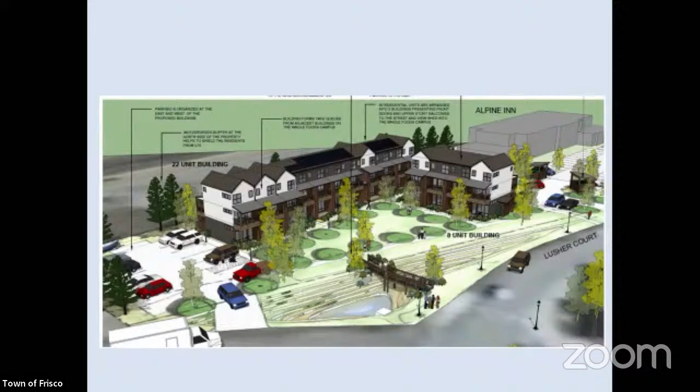This is located in the Gateway Zone District, so multi-unit residential buildings are a conditional use in the Gateway Zone District. So the applicant at this time is requesting feedback on both the sketch plan as well as the potential conditional use application. The property is bounded by I-70 on the north, the Summit Suites, formerly known as the Baymont Inn, on the east, and then the Frisco Transit Center to the southeast and the Base Camp Outer Range Brewing and that development to the southwest.

The site, so this parcel, it's an odd shaped parcel. As you can see, it's a triangular parcel, about 2.5 acres in size. It was platted originally in 1973. As you can see here, the current Alpine Inn is located in the northeast corner of the property. That was originally constructed in 1994.

And then prior to the construction of the Alpine Inn, there was a snow storage easement that was created in the central part of the lot right here, I'm highlighting with my cursor. That snow storage easement is for the benefit of the Frisco Station development. So that's where the Walmart and Safeway and those all other businesses have their snow storage.

Recently, actually about a month ago, planning staff approved a planning application to relocate that snow storage easement from this current location to the very extreme westerly portion of the property. It met all town standards for that. However, we have received a public comment today from an attorney representing the Frisco Station that they have not yet executed that snow storage easement.

As this is still a preliminary sketch plan application for this, it can certainly go ahead and move forward. Once you get to the final site plan approval, if the application proceeds to that point and the easement has not been resolved, that certainly could be a condition of approval. No building permits will be issued if that easement is not relocated. So again, that's the applicant moving forward at their own risk if they so desire. But again, the easement will have to be formally recorded and relocated before any building permits will be issued.

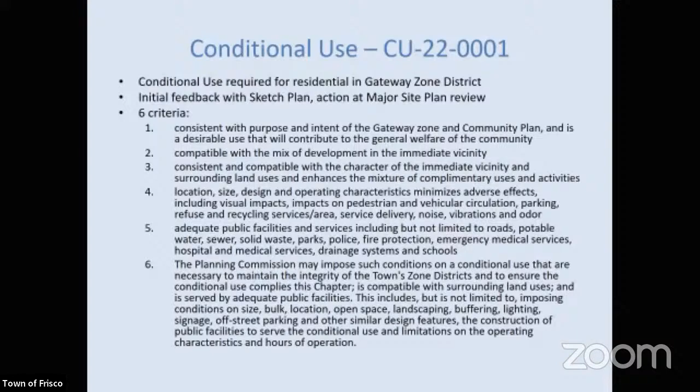Moving on to development standards, I'm going to only highlight and focus on the development standards which are not apparently met at this stage of the application, and also standards where it may be worth feedback to the applicant on those from the planning commission. So some of these key standards are...

Non-vehicular access. This is highlighted because we are now placing a residential use in a commercial area, and it's a conditional use. I think the access is probably adequate for the current vehicle-oriented commercial uses that are present in this area. The question maybe for planning commission to consider is: is the proposed non-vehicular access, pedestrian and bicycle access, adequate for the addition of residential uses into this area?

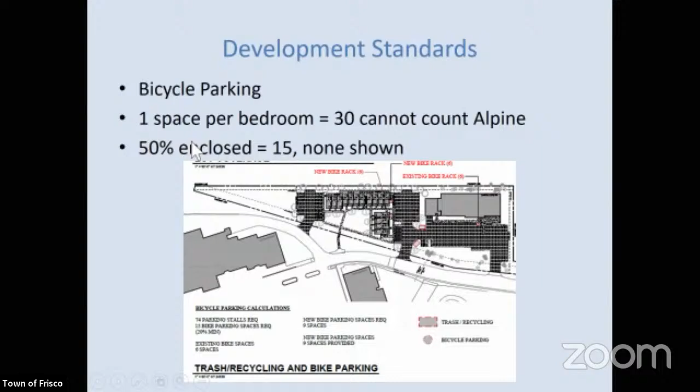Additional comments, and now we get into some of the development standards. As this is a mixed-use development technically, because it is on a parcel with an existing commercial use, which is the Alpine Inn, the non-residential development standards do apply to this.

Some of the keys here I'll just highlight are facade standards, building elements, and articulation as standards that may not be met at this time or may require additional information. In particular, I'll highlight a couple.

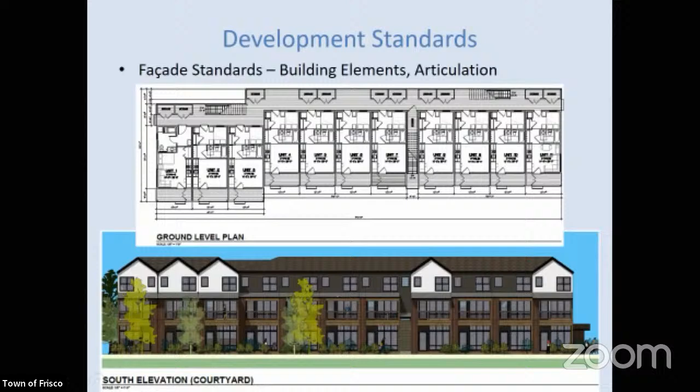Similarly, the roof standards require that no more than 66% of the roof line is at any particular elevation. Based on the information presented at this time, it's not clear whether or not that standard is met. So calling it out at this point in time so that the Planning Commission can request additional information from the applicant, and the applicant can provide additional detail at the next stage, at their next submittal.

Here we are with the roof standards again. Again, you see some very simple roof forms. Maybe the elevation view isn't the greatest, and maybe there are additional breaks. However, we don't have that information at this point in time.

Moving along, a couple other, and this is maybe a little bit more of a minor standard, but it is a concern again, because we are placing a residential use in a commercial area. We want to make sure that the parking for that is buffered as required by the code.

Under the code, you can have some parking in front of the building as long as it is buffered. However, in this case, the landscaping is minimal.

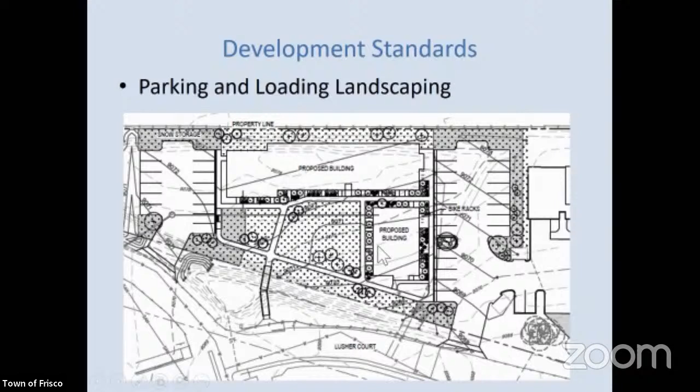Finally, staff has compiled a number of comments and places where you may be able to provide feedback to the applicant. Again, without reading them all, as you do have the staff report, some of the highlights are feedback on the proposed conditional use to allow the multi-unit residential use, potential conditions if you are inclined to approve a conditional use once the full major site plan submittal has been submitted.

Feedback on non-vehicular access, compatibility with neighborhood character in relation to nearby properties, compliance with facade standards related to building elements, articulation and variation in wall planes, feedback on roof design and compliance with roof standards, and finally building materials, colors and design, and the parking lot landscaping. So again, that's the high points.

Happy to answer any questions you may have. I do also have the full submittal from the applicant available to review if you have some particular questions on any of their design drawings.

Great. Thanks, Don. Great presentation. At this point, if the commissioners have any questions of staff on the staff report, Patrick, we'll start with you.

I'm a little bit fuzzy on the snow storage letter that we got from public comment. We're supposed to submit it when, and what's been agreed to? Can you just timeline that for us really quick?

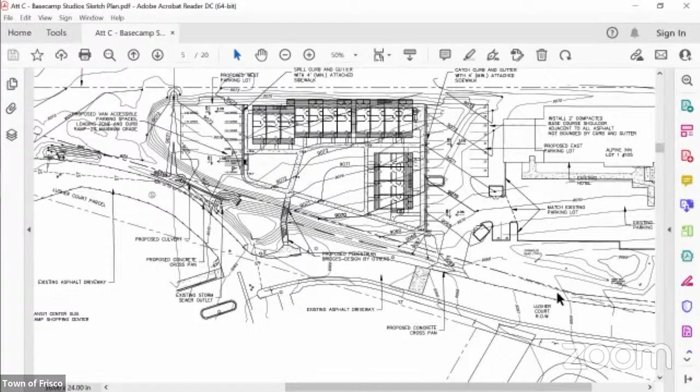Okay, and last question. In your background it says on May 3rd, 2012, planning commission unanimously voted 7-0 to approve the development application for Alpine Inn to add almost 2,200 square feet of gross floor area. That was approved, but just never happened?

No, I believe that did occur, and I think it was a conversion of space. I didn't do a lot of research into exactly what that was. The current Alpine Inn is somewhere in the ballpark of 20,000 square feet, and I don't know if that was a manager's area or what. I did not do a lot of research on that.

Thank you, Patrick. Ira? Sure, I thank you, Patrick, also, because the sidewalks and bike paths, I think, are a critical item to be looked at, and maybe, like you say, required.

So it's a commercial entity in its entirety, and this is like a residential component, which will be adjacent to I-70. So is there any addressing of safety concerns with residents backing up to I-70?

Not at this time, and there is enough of a buffer because it is the I-70 right of way. If I zoom back out on the presentation, I think you can see it. It's actually zoomed in too far, but there is a fair amount of distance between the actual property line and the I-70 pavement. So I don't know that there's a huge concern for safety from that.

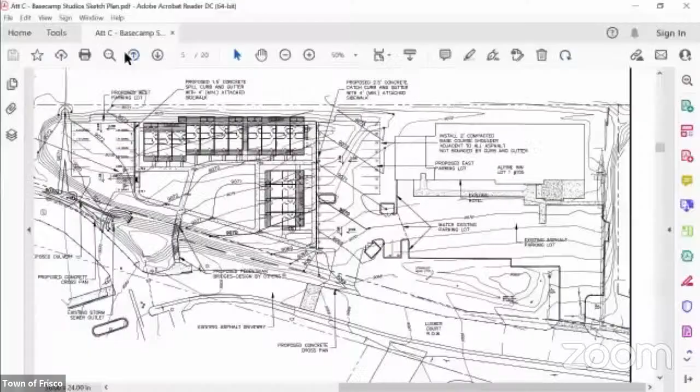I did not see parking crossing the setback, actually. What sheet are you on? Can you pull up A003 site plan? I think I can. Yeah, that's the one I'm looking at. It shows a setback on there, and it shows 3 of the potential parking spaces getting clipped by that.

Almost there. Yeah, so if you zoom in, like those 2 right there, you see that setback line. So that one right there is getting clipped, and then up at the west end, one of the ADA spots is getting clipped almost in half. That one is right there. Another spot getting clipped there.

Is that allowed? I'll have to take a closer read at the code and see if that is a code issue, and certainly we'll note that. If it is an issue, it'll be fixed before the next submittal. Okay, just curious how we treat those.

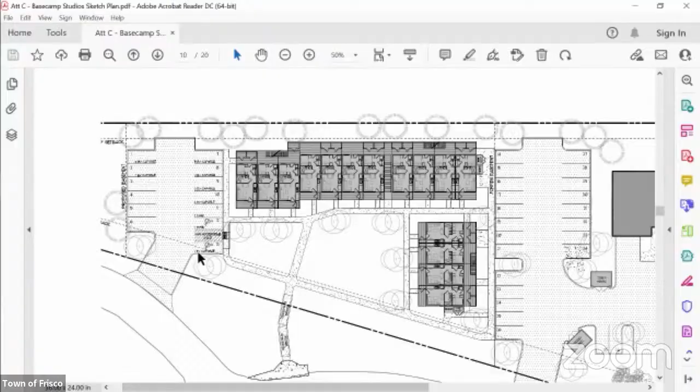And I think a lot of that is in the eye of the beholder, because the standards talk about compatibility with the general vicinity and how much duplication is there. I think you could certainly have that conversation with the applicant about the similarity. Again, at this point in time, I don't know that staff would consider that any of the facade standards have been met, because of the articulation and some of the other design issues. Right, yeah, we're going to get into that for sure. But I'm just curious because I know excessive similarity has come up on other applications in the past.

And I wasn't sure if that was applicable for this, or if for some reason we weren't supposed to be looking at that. No, I think it is applicable. I guess the standard there is, is this in the vicinity? Is this far enough away from some of those other projects that similarity doesn't apply? And that again can be in the eye of the planning commission. Okay, that's all the questions I have for staff. Thanks, Don. Thank you, Andy.

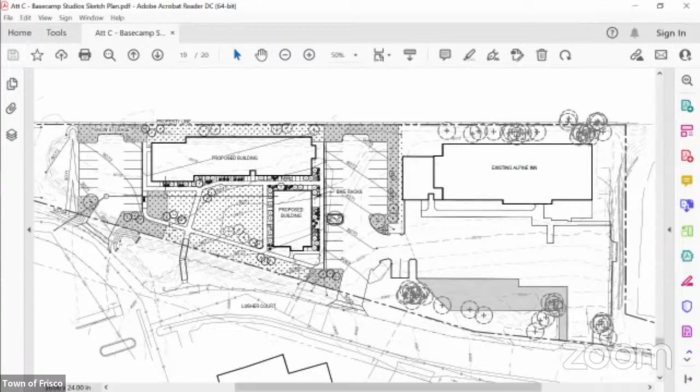Okay, great. And then my other question is, so the hotel technically right now is long-term rental housing, right? The Alpine Inn was master leased by Summit County, I think effective July 1st of last year. It is being used, it still is transient housing. They do have a master lease on it though. So there's no kitchens in it, so they're not actually considered dwelling units at this point.

Oh, okay, so it's because they don't have a kitchen, because technically it's not a hotel, it's not functioning as a commercial entity like a hotel. And so from a density perspective, I guess I could argue that they'd be going over density sort of. Yeah, and we certainly consider that as staff as well, but at this point in time, because they still only have one kitchen in that entire Alpine Inn, for the manager's unit, those units are not considered dwelling units because they do not have a kitchen.

Okay, and they could never be converted if this development gets approved, because now there's not enough density? They could, but they'd have to meet density requirements at that point in time. If this development goes through as proposed, there'd still be 9 units of density available on this property. If the Alpine Inn was to convert and deed restrict, trying to do quick math, about 20 or so of those units to 100% AMI and meet our code requirements, they could have 20 units and then 20 units deed restricted in order to make that happen.

Can everyone see this? Yes. Awesome, thank you. Good evening, and thanks for having us tonight. My name is Michael Ann Marchand, and I'm the development manager for Bryn Gray Partners.

To begin, I'd like to quickly introduce the rest of my team. Joining me tonight is David O'Neill, founder and CEO of Bryn Gray Partners, Tom Lyon of Wolf Lyon Architects, and Ronnie Pelusio of Polona Architects and Urbanists. Many of you may be familiar with our team from our past work throughout Summit County: the Wellington and Peak One neighborhoods, Centura Studios, and, setting the context for our conversation tonight, Basecamp. Also, to round out our team, we've got our civil engineer, Don Lineweber of Civil Insight, and our landscape architect, Megan Tesson of Norris Design.

Basecamp began with a vision back in 2014, and as you can see here, it was an open field framed by exceptional views of Peak One. Over the years, Basecamp has grown into a thriving and vibrant community center with establishments that have become part of daily life for locals and visitors alike. A few notable examples, which you are all likely familiar with, are Whole Foods Market, Outer Range Brewery, and the Steadman Clinic, just to name a few.

Sales tax collections at Basecamp represented 16% of Frisco's total sales tax collections in 2020. And at the end of the day, we're very proud that it's ended up being one of the world's highest transit-oriented developments due to its proximity to the Frisco Transit Center.

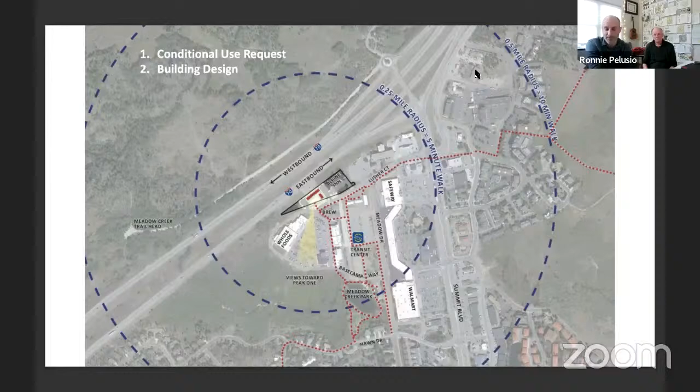I wanted to turn the attention over to the 3D model here. I'm going to have to take the screen, oh well, actually Michael, can you go to the next slide? We kind of hopped back and forth on this building. Okay, so this building is not the building that we're proposing.

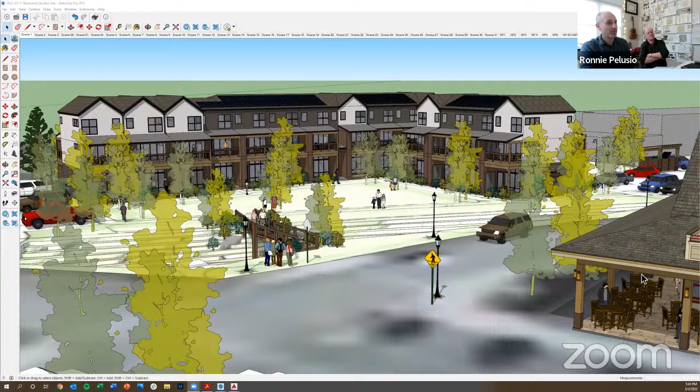We're going to come back to these buildings in a second, but I just want to point out Lusher Court is in the foreground, this brown car is on Lusher Court, and this building on the right is the brewery. The gray building in the background is the Alpine Inn. We just didn't render it yet, but we do have a really good document of the rest of the buildings on this campus, because as you know, we worked on those buildings as designers and developers.

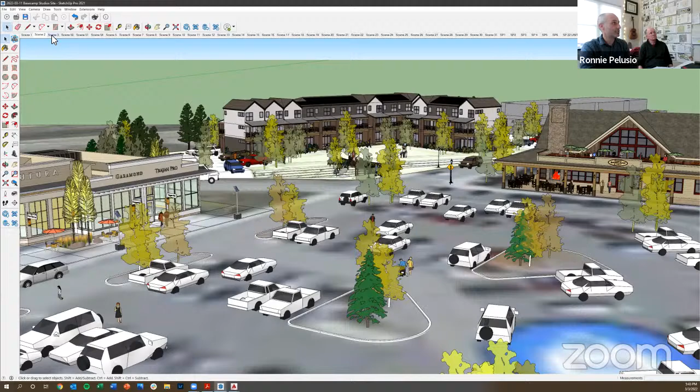And you can see that as you back out from the site, our proposed building location really helps to anchor the north end of this campus. Generally speaking, that's the north and this is the south, although the angle of this property is skewed a bit. There's a building in the foreground that we didn't render, it's right here, it's the Pinnacle building. But we have the rest of them, and we left that out so you could see this triangular shape of buildings, as well as how that northern building proposed anchors the complex.

It does two things. Again, this reciprocal relationship. It helps create a buffer for the campus of buildings, like on the north side against the highway, which is behind them. And then it also helps these buildings have opportunity for views and access to southern light across the open area between buildings of the plaza.

The way we did that is we strategically located parking on either side in kind of this dumbbell fashion on either side of our proposal. That helps get the buildings where we'd like them so they can anchor that location, as well as be convenient for residents who can access parking for themselves. But also it helps break up what could be a larger pool of parking into two smaller pools, de-emphasizing the car and putting the focus on the buildings.

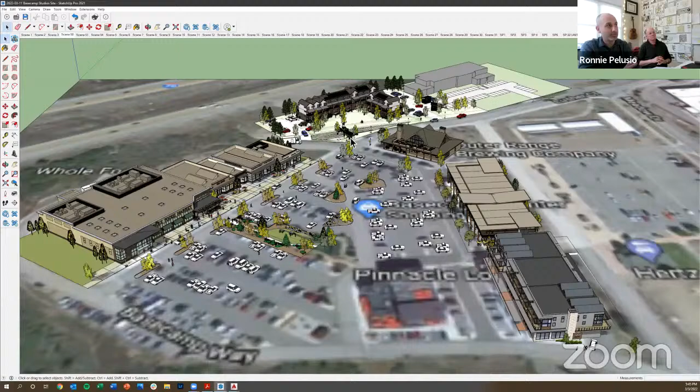I'm just going to fly down here for a second. This is the 3D model of the building we were showing you the image of a moment ago. That's already constructed on site. You can see the forward-facing gables, the horizontality of other aspects of the building, and again the asymmetrical composition of windows and the material changes. Just to note, there's a ground floor plate here, and then there are units with lofts above. So it's kind of like ground floor and then a unit and a half or two stories above that, all part of one unit.

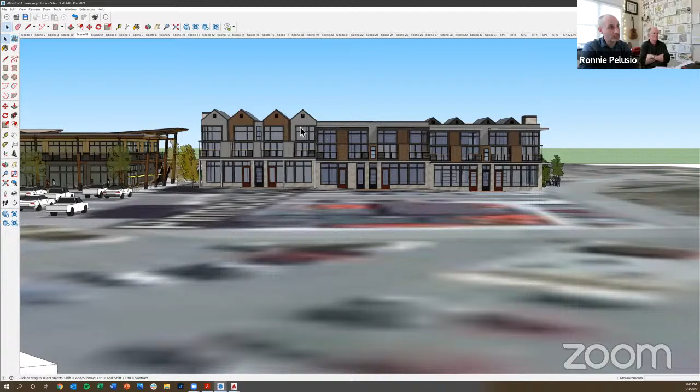So the southeast corner of the site, on the right-hand side now, and the north corner of the site again have this kind of dumbbell relationship of residential use at this location. Going back to the conditional use, this really helps animate the plaza. Obviously there's the economic benefit I described a moment ago, and the availability of resources, but it does this wonderful daily life thing as well - it brings the presence of people there 24 hours a day, which provides security, animates the public realm, and helps make this a more vibrant place. As the conditional use talks about bringing greater balance of uses, we think the addition of more residential use on this site only adds value to it.

So we're going to zoom in to the site here. And Andrew, since I see you, I'm just going to single you out - is this running smoothly on your side? Can you see okay? Good. And so we're just going to zoom into the building.

We know that in the packet there are a couple of images that show these buildings flat-on, and that's a very common architectural practice where you look at a building in elevation - it's just like a 2D representation of the building. In real life you never see it like that. In this case, in particular, we have an L-shaped proposal, so you'll always get a building that is mostly in front of another building, and you will always see this at ground level. So some of the articulation standards, in particular for roof lines that come up, we think aren't going to be viewed as described in the document, and they truly will be viewed as shown here.

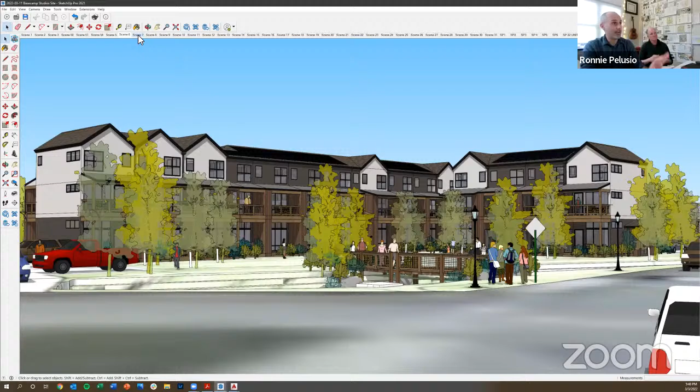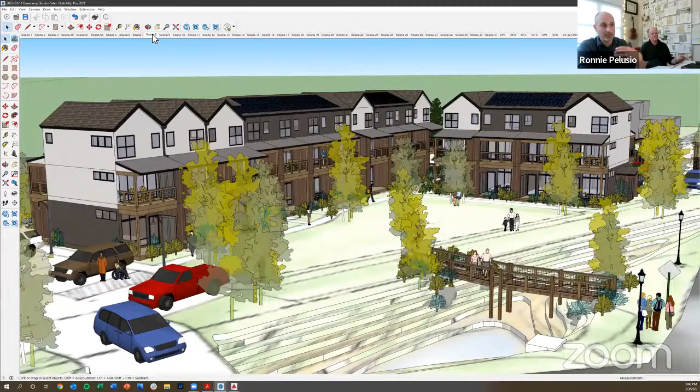I'm going to fly around. We're going to talk a little bit about the aspects of the design that provide articulation, but I want to just rotate around for a second and get up over the building. I know there are some questions about the circulation patterns - how these residents might access the greater community. We can talk about pedestrian circulation and where the sidewalks are. We thought it would be interesting to have some sort of bridge element that was a connector that was also decorative. It might not end up in this location, and we might end up modifying the sidewalk system. We have some ideas about that, and I'm sure you do as well. But we just want to say the design intent here is to create some connectivity.

And in fact, having these buildings here, as I was saying, it helps with what's happening in the common area between these buildings, but also helps animate what's happening along Lusher Court. I think it only provides a better gateway to the community.

So there are ground floor units and second floor units. Second floor units also occupy the third floor in the form of a loft, much like the other Basecamp residence building on site. Ground floor units have direct access to the courtyard.

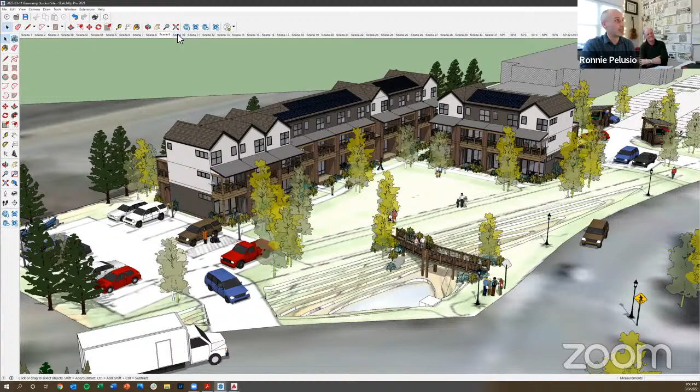They have doors and porches on the courtyard side. Second floor units also have these outdoor porches. They're covered porches, and they all have the opportunity to face this common space, bringing life and a little bit of private outdoor space for all the residents.

Each of these porches also has storage, so there are storage lockers on every one of these units. Every unit front has a porch, every unit has a storage locker, and those storage lockers and porches bring articulation to the front of these buildings that I think the plan, elevation, and 2D representation really do a disservice describing.

I'm just going to kind of float around this. The second floors of these buildings are vertically serviced, so it's like, where are the stairs at the non-courtyard side of the buildings?

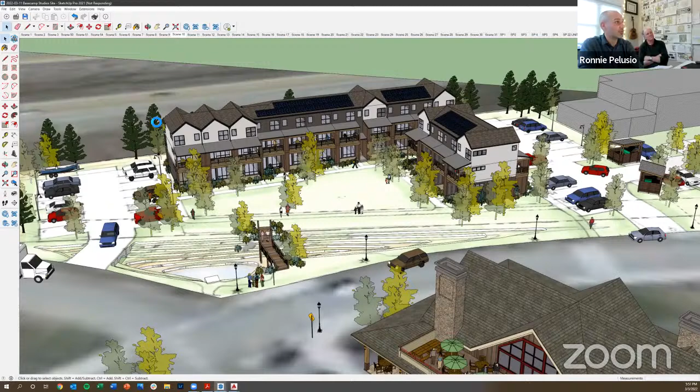Tom was just mentioning to me there's an important feature to mention here, which is there are a couple of ways you access the second floor. Second floors are accessed again at the non-courtyard side via a set of stairs. The larger building has stairs on either end at the non-courtyard side, and it also has a set of stairs in the middle of that building, so residents can come off the courtyard, go up through the courtyard to access their second floor units, which we thought was a valuable option, and also helps break up the overall building.

You can clearly see here how parking is pooled on either side of these buildings, and the trash and recycling collection systems are both on the northeastern side.

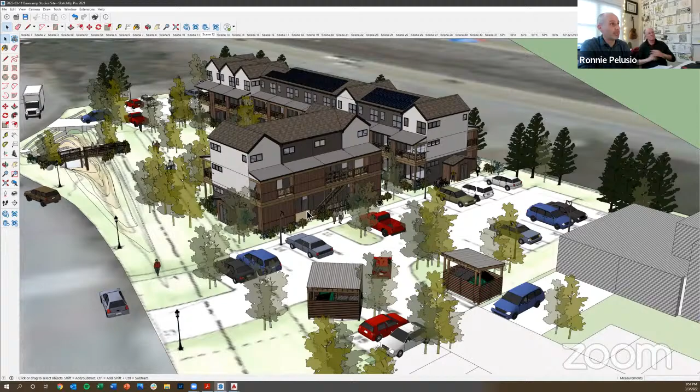And rotating around, you can see that the storage units at the backs, or on the non-courtyard side of this building, are incorporated into that circulation system, creating this interesting patchwork of open and closed spaces that adds articulation to the building.

Every unit has storage on the front, and every unit has storage along the stair side. On the stair side, those areas are big enough for people to put their bicycles, so we think we're meeting the bicycle storage requirement there, although it wasn't really highlighted in our document.

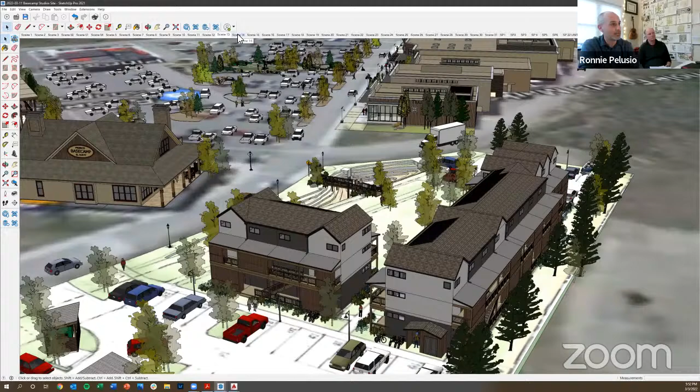As you rotate around this building and site, you can see that the larger building has the same set of architectural principles that provide articulation, the same series of gable forms. And overall, this shape is best demonstrated from this view, where the building captures the end of the open area of the field of the existing Basecamp Plaza and offers these units views and access to natural light.

So I'm going to keep rotating around this. This is kind of the I-70 side of the building. Here is the other pool of parking. And there was a question about noise.

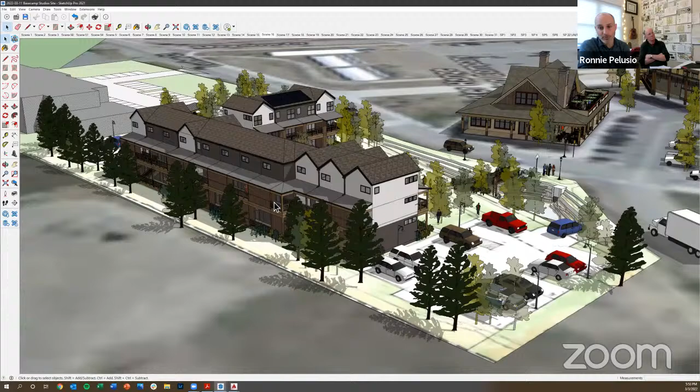One of the ways we're mitigating noise for the residents, which I know isn't necessarily of interest to the planning commission but how it's being considered, is that these storage lockers at the backs of those units actually create a buffer. There's a corridor behind them, and there's storage lockers. We will make sure we're doing whatever we can to soundproof the walls that face I-70 and make sure the glazing on those windows also meets the criteria we have for ourselves, to hold the standard and make sure residents have a pleasant living environment.

I'm just going to kind of float around here. You're getting another view of the green space, and again, we're just going to get back down at ground level, because we really think this is the overall character that people will relate to at pedestrian or vehicular height.

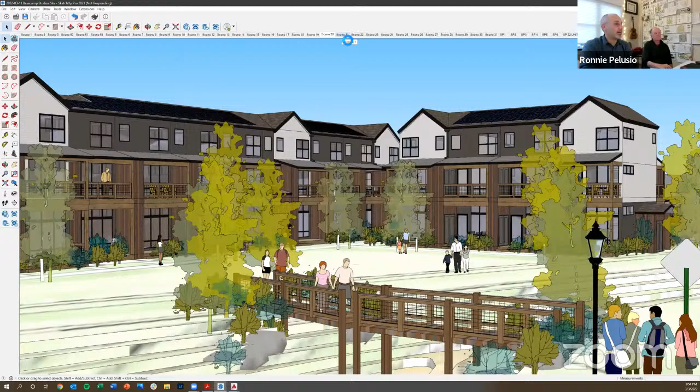And as the model populates here, you can see we have a variety of materials. We've demonstrated that in the packet, and we can show you exactly what those are. We're trying to be sensitive with a color scheme that meets your chromatic criteria, as well as be reflective of the overall design ideas already present in the community.

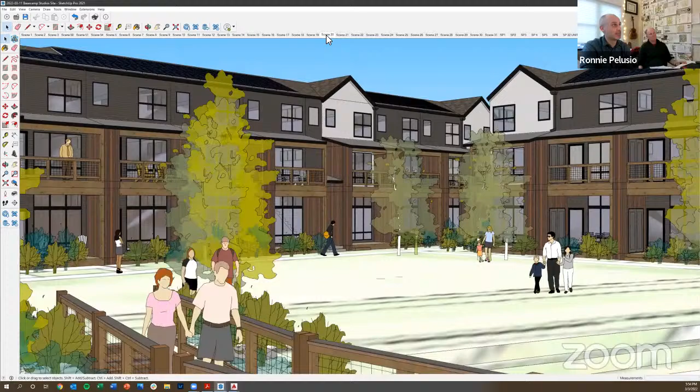We're really proud of this and believe it will be an asset to the overall composition. So we're hoping to receive your approval ultimately on the conditional use request.

I'm a strong believer that this is a good location for additional residential units. This site is underutilized and it's an infill site, and you can see the many ways in which it demonstrates this synergistic opportunity. We also believe the buildings meet the intent of the building articulation standards, which is for them to be compatible with the surrounding context. We can talk more about some of those aspects if you're interested, but we are strong believers that there is the appropriate amount of articulation on these buildings to let them be compatible with the rest of the adjacent development.

Thank you. If you guys have any questions, I'll turn it over to you.

Thank you. Commissioner, questions of the applicant, Robert? We'll start. No, you want to start on the other side? Okay, Patrick, these are going to be in no particular order. You hear me this time, I hope. Yes, Ronnie, can you hear Patrick? Kind of, okay. Can you hear me now? Yes, yes, thanks. All right, Patrick.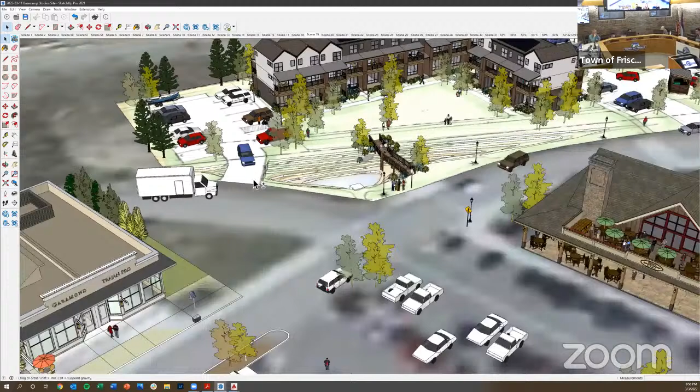Yeah, that's a really good question. You know, this image, there's some work that needs to be done here. I'll just say there are some detention requirements we're still working out, since we're at the preliminary level. I believe it's likely that this detention area you guys might be familiar with, the shape of that will likely need to be modified to provide some of the detention that the proposed property will require. And in that process, there's a good chance we're going to modify what's happening over on this corner of the property.

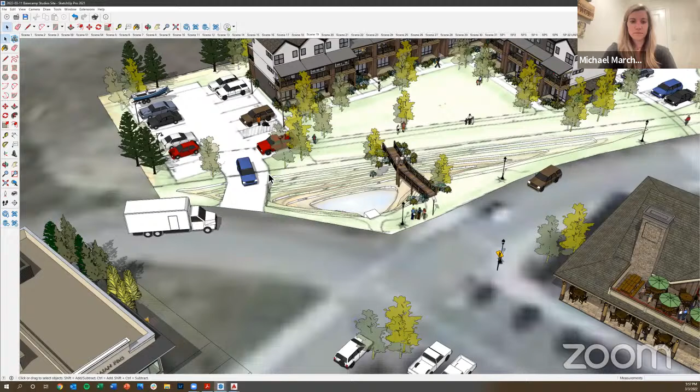We've also looked at this very edge condition you're talking about, and we're contemplating, although not sure yet, whether we'll have an architectural feature that's a pedestrian bridge, either in this location or an alternate location, which by the way we're considering moving a little further north and east for functional purposes. We might also animate this, if it ends up having some topographic change there, with similar kinds of railing detailing that could help buffer and protect that.

Did you look at alternative resident access to the huge long facade along I-70? I'll save my comments. Did you have another option that you explored? Could you ask that again? Did we look at an option? Did you explore different resident access other than along I-70 on that long facade?

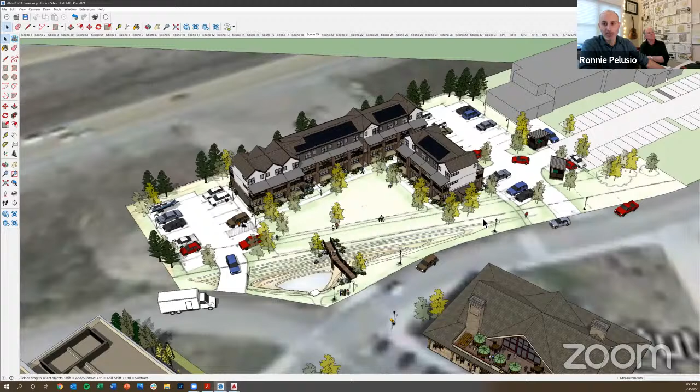Well, we did. That's a really good question, so yeah, we spent some time on this. Not to belabor it, but at one point we had the building up against the frontage here, and we thought it was a way to bring the building closer to the road and put all the parking in a different location, to create a little bit of a buffer. It created a bit more of a front and back. We really felt like putting the park in the front was a wonderful gesture for the residents and the general public.

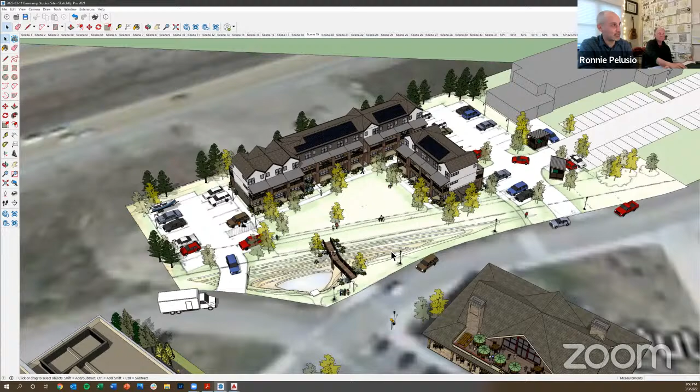That being said, what we didn't want to do was create another motel. The motel typology often has corridor circulation at the front on both levels. What we find is the problem with having circulation at the green court side is that it makes the space unusable, so everybody would be walking across one another's porch to get to their units, making it less of a private amenity that actually gets used. So we did contemplate it, but if you have a thought that could influence this, we'd love to hear it.

Okay, and my last question is about the two units on the long bar that are in the crook of the L, against the other building. Can you talk about their view, to see anything, or right to light? Yeah, that's really good. I mean, it's so great that you're thinking about this too.

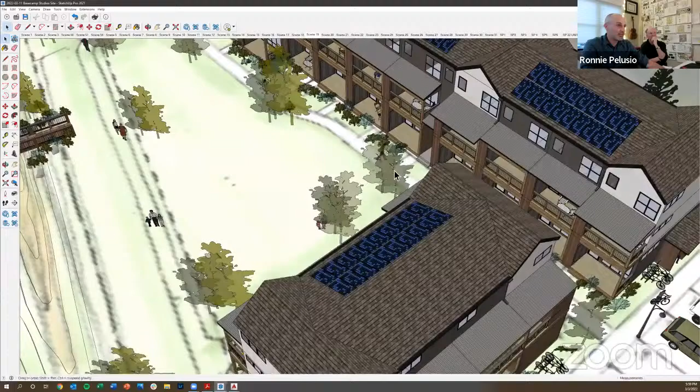So we actually got in this model and placed ourselves on these porches, and I could try to do it, it's going to be a little wonky, but these units here don't really get the opportunity to view that way, but what they get are views this way. And we went on Google Earth, and as you know, there's mountain views everywhere. So these two end units really have great access to views and light that are kind of broadside of this building.

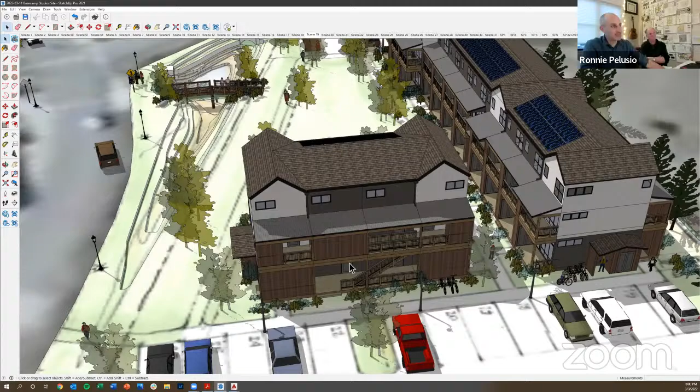We also dropped a character on the porch of this unit. While it's tucked back in there, that unit still gets pretty good views. And views aren't the only thing—views and light through the courtyard. We kind of felt like the darkest unit of them all is this guy down on the lower level. But we didn't want to connect the buildings.

We wanted to make a corridor that was meaningful for pedestrians. So we felt that there might be one unit that is the least favorable, but that these other units are still of high quality.

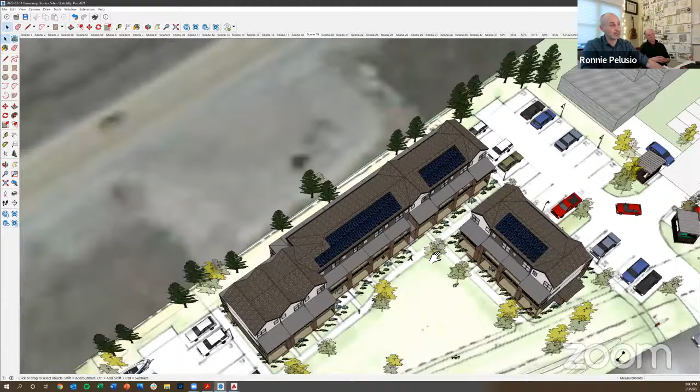Yes. So I appreciate your coming forth with this. A couple of questions. So you can hear me, right? My microphone's better? Yep, now that you're close to it, we can.

So the first question—those solar panels, is that artistic license or is that a reality? Well, it's both real and a possibility. I wonder if you're asking, are we going to put solar panels on today or not? We don't know. That would be a very simple question, yes.

Well, what we've done is we've designed these roofs to be able to handle photovoltaic. And you have an aspect of your code, which I could really get into, and I would love to do this with you at some point, that really makes it challenging because your code requires new construction to be net zero ready. I feel like I could talk about this—you can, if you want, I can get into greater detail, but I'm just going to say...

In order to be net zero ready, based on the way your building department and planning department interpret that, there needs to be, in general, adequate roof space to, at a future point, be ready for offsetting the energy use on site. So right now we need to make sure we have enough roof space to do that. I don't think these buildings are technically going to be required to have them today, and we haven't made a determination if we're going to put PV on it. But ultimately that conversation will come at a point when we start to design the utilities and heating system, primarily for the units. So I don't have an answer for you, but I do know we need to commit to having roof space to do it. And we're strong believers that being net zero ready is a good thing to do.

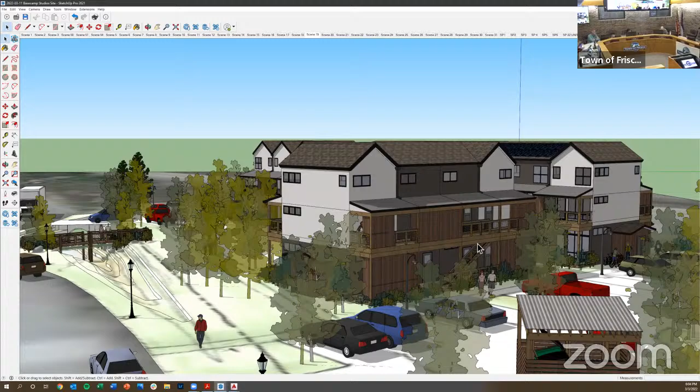That's a good suggestion. And there'd be no architecture there at all—it would just be silent design for a silent outcome. That's a great suggestion. Yeah, we're going to do the best we can to mitigate that.

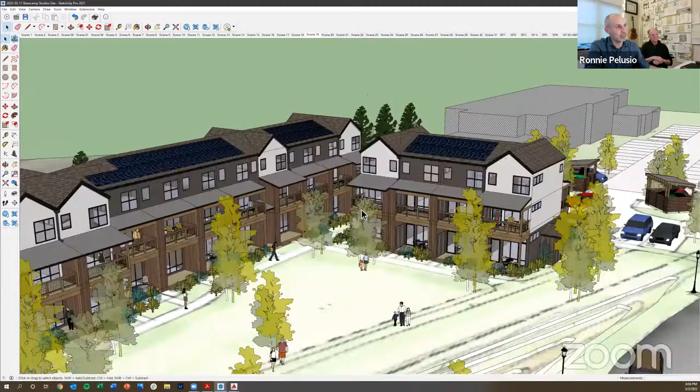And I think what you're describing is a really good approach to it. You can see we've tried to limit—I mean, we want to get the windows where we can, right? But you can see that the windows on the non-green side of the buildings are much smaller than the windows on the green side. That's part of the ways in which we're trying to mitigate that sound. But I think what you're saying is very valuable.

Thank you. So overall, I think the use of that infill is commendable. I'll note that point, which I think is part of our conversation today. Questions only. We're just questions only. Yeah, that's it. Thank you.

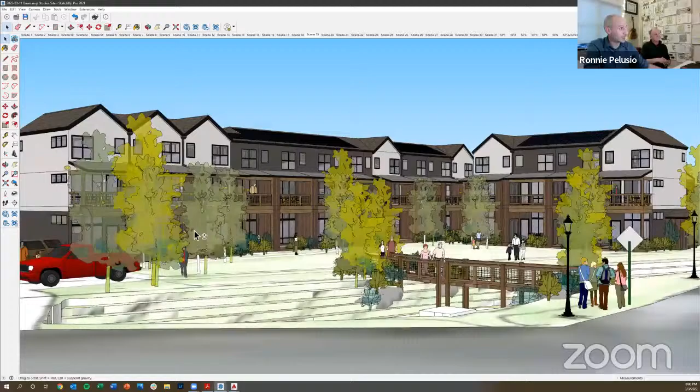Are any of these units going to be accessible ready? Yes, they will. We will definitely make sure we meet those requirements. I'm just going to float around to the side - the ramp required to get into the lower level units will be provided on this corner of the site, if this moves forward as is.

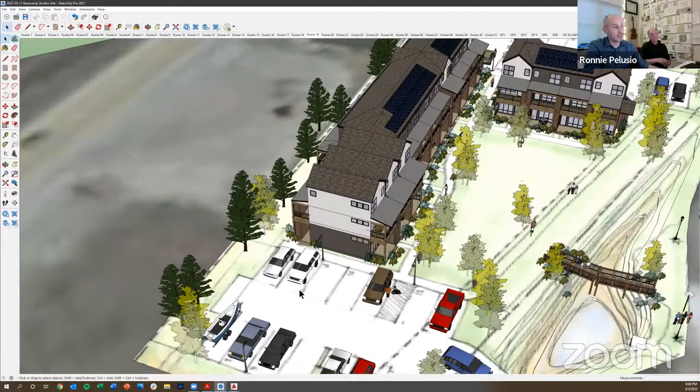The ADA parking stalls are also over on this corner, so I believe the ADA unit will be at this corner. And again, similar to the Centura project which we reviewed with you, all of the ground floor units will be type B units.

Would you be willing to put a sidewalk in on the north side of the street in front of your complex and the Alpine Inn, to make for better pedestrian access in what I consider a fairly intense corridor? I ride my bike in there a lot, and I'm thrilled to hear you might be moving that walkway, because where you have the sidewalk now, I don't think is a very safe place.

Yeah, we agree. That's really great. Since staff's report and since the submittal, our team has gotten together and we've got a really strong team here - our civil engineer and landscape designers are on this call as well, and we have the same thought, Andy. What we're planning, what we'd like to do to improve this - this 3D model doesn't totally demonstrate it...

What we'd like to do is extend the sidewalk on the north side of Lusher Court across all the way to the entrance of this parking area. Then we're contemplating extending one of these internal sidewalks and crossing the detention area at a location that's not right in the middle. That'll let us still make it interesting - it'll still look something similar to this, but easier to maintain so there's year-round pedestrian access across it.

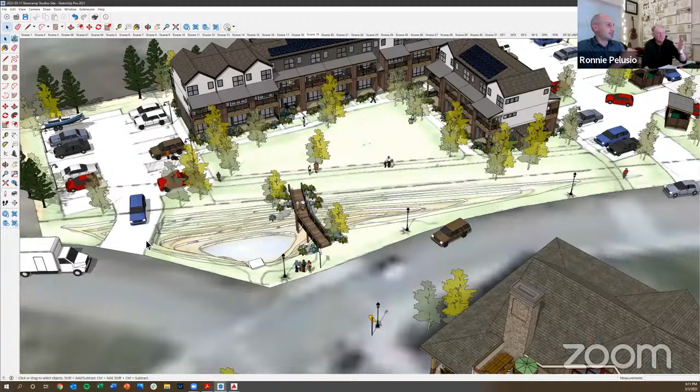And speaking of buffering, you mentioned buffering - I totally agree with all the comments about buffering the view of the parking lots. This landscaping shown is representation only; our landscape architect has done a much better job.

But we're not seeing it here yet. So, yeah, we're gonna get there with you. We're gonna make sure we conceal those cars the best that we can and meet the requirement. And it's our desire to make this a wonderful place as well. We've got a lot invested in this.

Since you're getting the benefit of the acreage from the Alpine Inn, wouldn't it be appropriate for you to put a sidewalk in front of the Alpine Inn also, not just in front of this particular building?

That is something we could talk about. We were not planning on doing that.

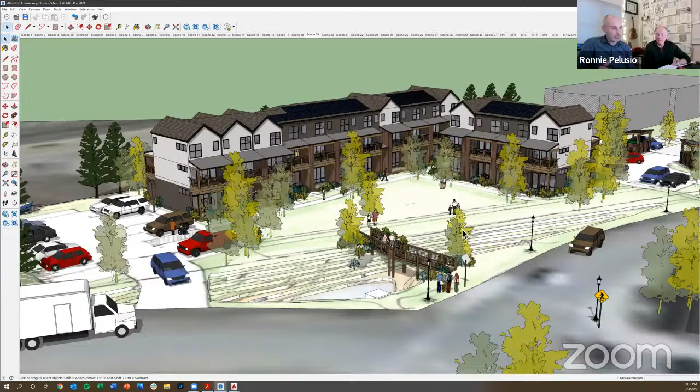The access points—and again, this image isn't the best to look at—but there are some questions about what do you do when you get over here. The circulation on Lusher Court is on the south side of Lusher Court, and the area amenities, we could probably pull that PDF up again.

Which shows the connection in the pedestrian trails. They all kind of link through the site and towards the south, that come along Base Camp Way and go to the transit center, and then the open space system. So the existing sidewalk on the south side of Lusher Court is starting to do that.

Maybe there's a connection issue to the trail system right here. I'm not sure if that's what Don was talking about. But it was our intention to create a sidewalk that connects from here to here, to use the existing crosswalk, because at one point we talked about having a crosswalk here and it was creating conflicts and swale.

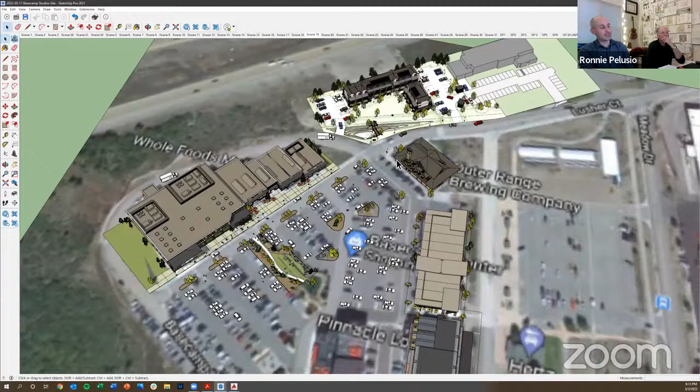Yeah, we were encouraged not to. And now looking at it, it's like, why would you do that? So we're thinking concentrate the crossing where it's the safest, and then use the existing infrastructure to get south and east through the community.

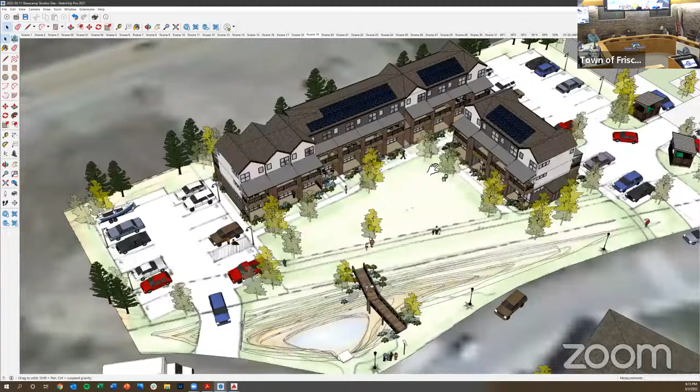I'll save my comments for the end, but I think it's short-sighted not to think about the east edge of the whole property also. I think I'm done. No more questions?

Okay, Andy, do you have any questions for the applicant? Yeah, I think a lot of the stuff that I was curious about has been covered, but I do still have one outstanding question, and that's the stair towers on the north side of the long building, to get to those upper floor units.

If you can spin around the back of the building there for a second. It seems like you've got this really narrow access to those stair towers. So every single person that has an upstairs unit has to walk between the storage locker and those first floor units to get to the stairs to the top.

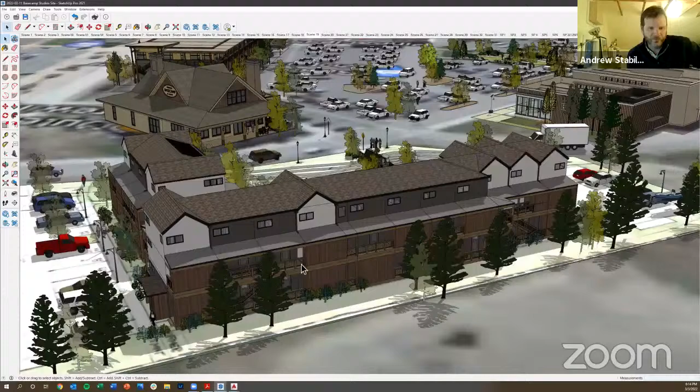You see how each of the staircases is set in from the corners of the building, so you have to actually walk through the corridor to even get to them. You can kind of see that entrance down there, right there—a 4-foot corridor. Did you think about bringing people to the stair towers around the outside of that storage somehow?

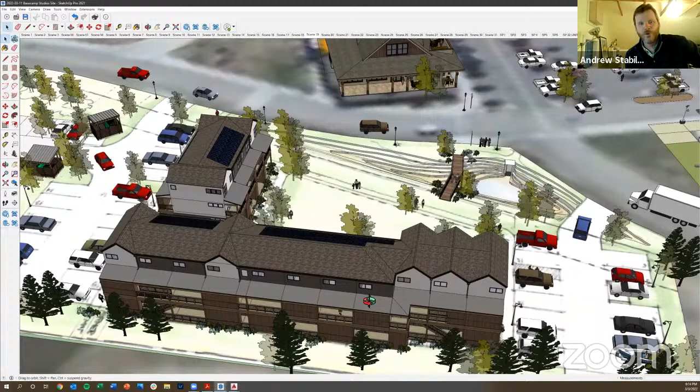Because it just feels like, you know, I moved a lot when I was living in units this size, and moving a couch through there and getting all your furniture through there, and just every day having to walk between someone's storage locker and their front door, seems like you're asking a lot.

Maybe there's a different way to get to those stairs. Maybe move them towards the outside of the building or get some access around the outside so you don't have to walk through there. Looking at it on the floor plan, it seems even tighter. But I was just curious if you had looked at that and if you had any thoughts on making sure those stair towers are easily accessible for all those upstairs units.

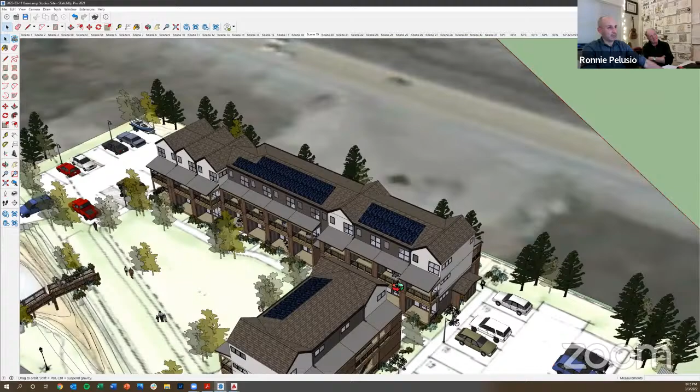No, that's really great, we did look at that actually. There was a point in which we had a stair tower on this end. We honestly didn't think it improved the access to the corridor. We do think this is the right place for the corridor, but we didn't think having the stair tower did. And I know you're looking at the plans, but in this model—it is a model—there's a 4-foot corridor, and then there's a 3.5-foot closet space.

So there are times when you're getting over 7 feet of clearance, and that's one of the benefits of this undulating design. It's doing wonderful things in terms of providing storage and giving the articulation to the building, but we're hoping that it breaks up the monotony for the user.

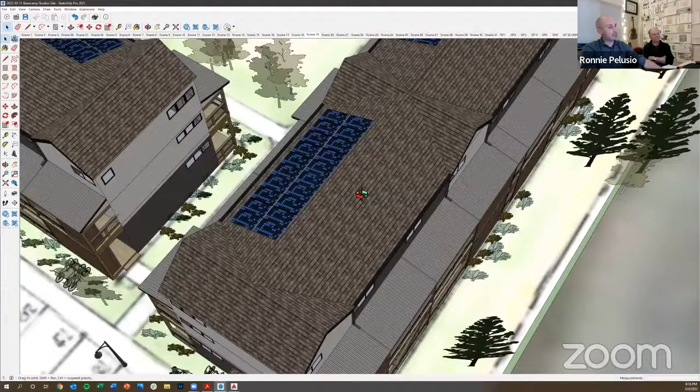And Andy, your question is really spot on. We really felt that putting a stair on the green court side of this was essential.

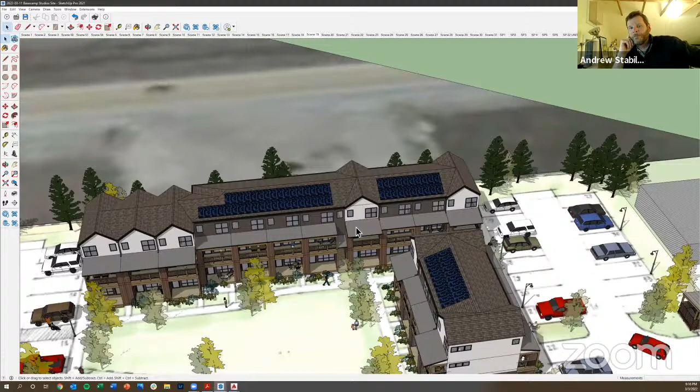No, that's a great stair. I just question the access to those two back stairs that make you walk between somebody's storage locker and their front door. It seems a little tight, but I agree. Nobody parking their car is using that stair you're pointing at, right? If you're parking your car and moving into your unit upstairs, you're coming through that back staircase and walking right through between somebody's storage locker and their front door. So the back seemed a little funky to me, to make somebody walk through that hallway just to get to the stair. I was just curious if you had looked at any other options there.

That's the only question I have. I'll save the rest for comments. Okay, great.

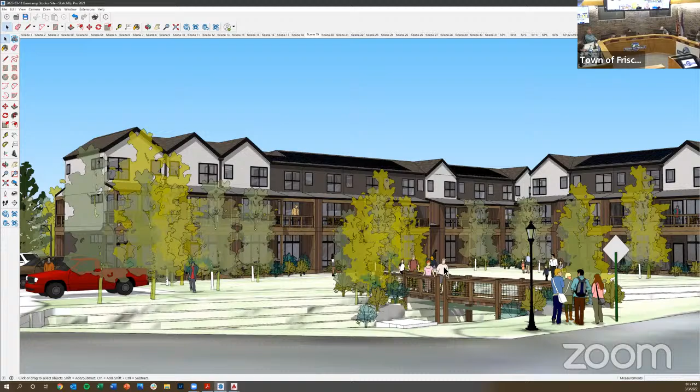What questions did I have for the applicant? A lot of your argument for the conditional use is around language like much needed housing in Frisco and a reference to a housing shortage. And the much needed housing that we need is affordable housing, workforce housing, senior housing. So I don't even know why you're using that language. As you said, you're the one that's been developing workforce housing all over, and clearly not committing to making this the product and using it as an argument for your conditional use. So I guess that's not a question, but I'm curious why you're using that type of language when you're not proposing the type of housing that we're really looking for.

Okay, that's a really good question. Well, first of all, my understanding is that the conditional use, and Don can jump in and talk about this, isn't what you're required to provide affordable housing. That's not a conditional use. Well, you're required to make an argument that you're benefiting the community, and your argument is that you're providing housing that is needed. Yep, that is one of the aspects, but that's just one. I don't think that is actually a checkbox criteria.

But again, bringing any housing to your community, I think, is valuable. Maybe I'm wrong, and that's not the case. But I'll also say the units we've designed here, outside of any deed restriction that may or may not be placed on a unit, are intentionally compact. They're 350 to 525 square feet. These are not 1,500 square foot units. And while I'm not in charge of this decision, while there isn't an AMI aspect capping the qualifications, there is an inherent piece of the design that does reduce the unit size and consequently reduce the cost to purchase them if they go to market.

So I wish I could say every project we did was just bringing affordable units to the market, because we have that problem here too, and we do a lot of affordable housing projects. But in light of the circumstances and what this project is, we think housing at this location is a good thing. We think compact housing, putting 30 more units in a location with access to these amenities, gives people an opportunity to get out of their car and reduce the carbon footprint, meeting other goals and objectives. And again, we think the design is sensitive in meeting that balance described in the conditional use criteria.

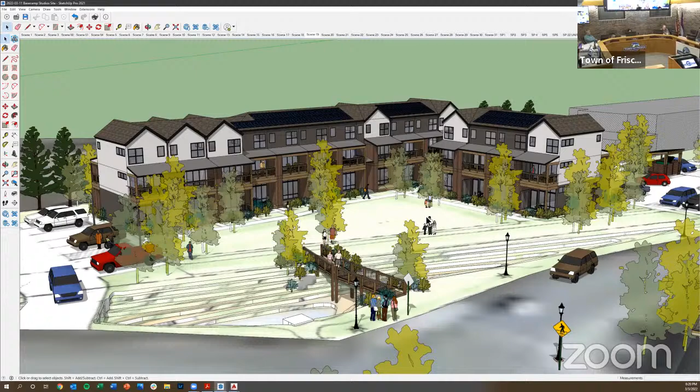Okay, can I ask you another question? The white or gray or whatever that color is, is it white or is it gray? Because it looks gray in some renderings and really white in others, like that one. I don't know if I just flipped to a PDF. I don't know if you guys can see it. Yes, yeah, we can see it.

Okay, so this is in your material, and it's hard to get the colors to match right, but these are the real colors we're proposing. The color that's B here is the same one that's on the building, so it's not a true white. We think it meets your chromatic color requirements embedded in your code. On the next round, what we're required to do, and we have it here actually, is send you a physical sample of all this so you could look at that. Okay, so it's more like a beige. Yeah, it's a warm gray. Okay.

Ronnie, you're the same architect of the Centura project, right? Yeah, our team is, Tom is here with me. But you're the architect. Yes, I am. Because this looks a lot to me like that development. So I guess that might also just be a comment, but I'll leave it at that.

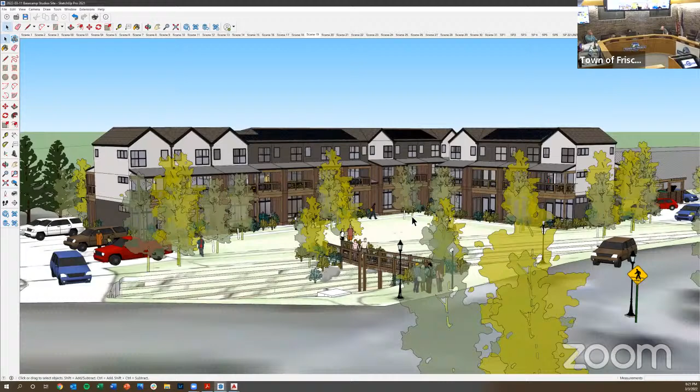We'd love to talk to you about that if you'd like. I see Andrew's got it up. I bet he's got a similar topic to talk about.

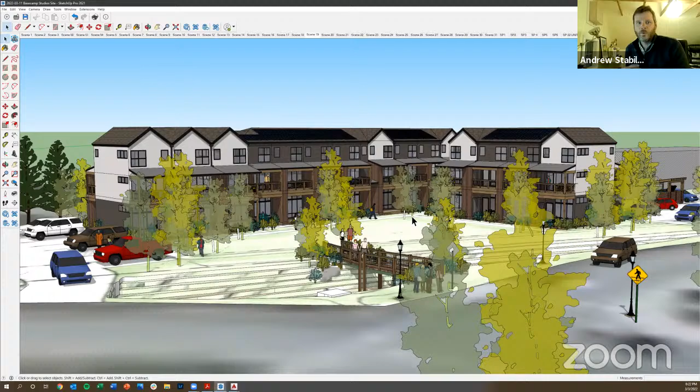Andy, I think you have another question. Yeah, only if you're done, Lena. I'm done. Okay, just a quick background. I know we have very similar micro units on the other side of the Basecamp. Can you tell us really quick what is going on with those units right now? Who's in those units? Are they owned? Are they rented? Are they locals? What's going on over there? Because we're probably looking at a very similar client base for these units, right?

The Basecamp residence is a total of 25 units. 20 of those are deed restricted and 5 of those are market rate. They are all occupied. So the deed restriction on that kept those as locals for the most part.

Who owns the market rate units? Are they locals, or in any way, are they renting those out? Can they rent those out? Do you know what's going on with those market rate units? I do not know who is in those market rate units at the time right now.

It's 50-50. Okay, thank you, that's all. Thank you, Lena, had to step away for a moment. Any other questions from commissioners?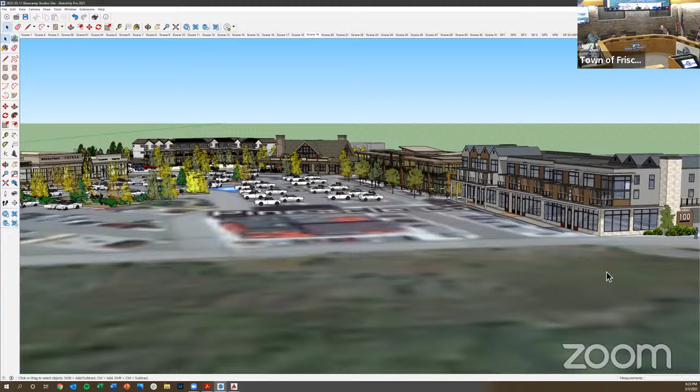Okay, we will move to public comment. I'm hopeful we'll be able to see who's on and who has potential public comment. If you want to make a public comment, please identify yourself with your address and your name for the record and your interest in the application. Please address the Planning Commission, not the applicant. All statements should be brief, 3 minutes or less, and non-repetitious. One other comment, if you're on the Zoom, please use the raise your hand function so we can see you and recognize you.

Seeing no public comment, I will close this section of this item and move on to commissioner comments. I would suggest we might take a short break, a moment till Lena returns. Oh, here she is. Okay. I just wanted her to be in the room when we started public comments.

Andy, why don't you start with your commissioner comments? Okay, then I'll hand it all back to Lena. Well, there's a lot on those questions, so I'll just start the discussion and maybe we'll come back around at some point. But I think it all hinges on the conditional use, or at least it starts there.

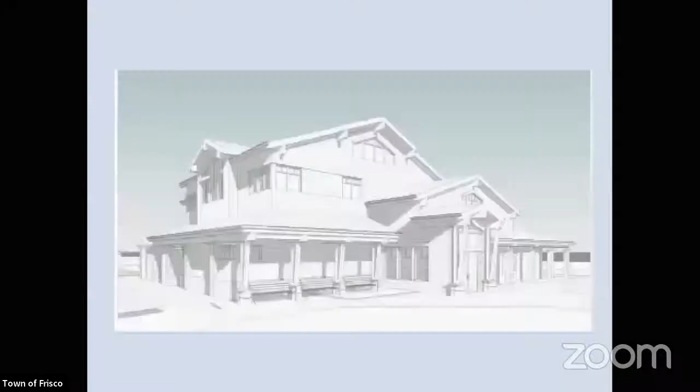Good evening, planning commissioners. This application is a major site plan submittal for MAJ 21-008, a new multipurpose recreation building out at the PRA. You did see a sketch plan earlier on this, so a lot of the information has already been addressed, but I'll go through a quick summary, highlighting some key points the planning commission needs to give feedback on or make a finding upon.

So, starting off here: in 2020, the Town of Frisco adopted the new Parks and Recreation Master Plan for the PRA. The PRA plan created a prioritized implementation schedule for future construction projects for the ultimate build-out of the site. That includes the primary and biggest focus of that initial phase, this building, which was identified in the PRA master plan as the village center.

Over design iterations and town council considerations, since the town is the actual owner and applicant of this, the design has been modified from the original master plan view of a 20,000 square foot building to what you see today, which is about a 7,600 square foot building.

This is not actually adding additional uses or new uses to the PRA. This is going to be essentially repurposing and creating additional space for the existing programs that are out there, moving offices out of the basement of the existing day lodge and into this new building.

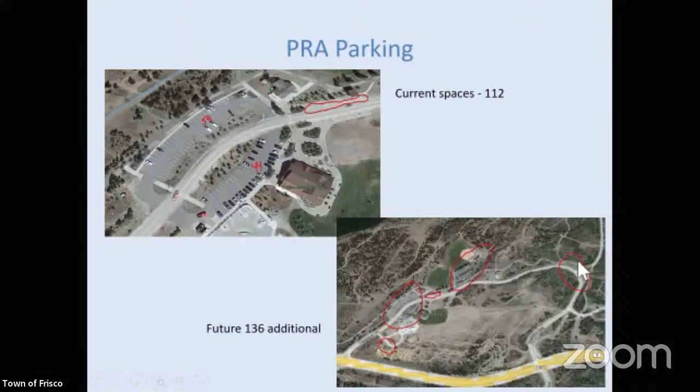Future parking will be part of the master plan implementation overall. As you can see here, the existing parking at the PRA is about 112 spaces, centered just to the north and west of the Day Lodge. As part of the master plan implementation, there's about another 136 spaces planned throughout the PRA area.

Development standards and compatibility is the next key step. The main issue here is, I guess, two things. One is the building articulation on the west facade. The west facade has a wall section 37 feet in length, as shown here, which does not meet that standard. There is an allowance in the code for an administrative adjustment to that articulation standard, as long as the planning commission makes a finding that it is appropriate.

The planning commission did indicate initial support at that sketch plan. So again, if the planning commission feels that the criteria and the standard is being met for that administrative adjustment, you'll need to make that finding as part of any motion on this.

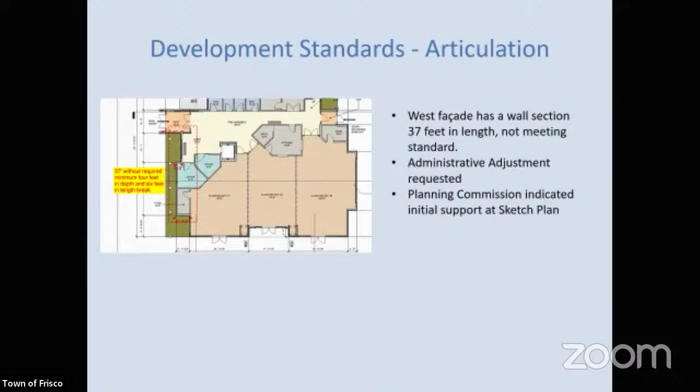Next piece that I want to address is actually the recommended standards and findings. I'm not going to read through all these, they are detailed in the staff report, but the short summary is that there is general conformance with the community plan, and general conformance with zoning regulations, specifically the Parks and Recreation District, specifically with respect to building height.

The Planning Commission finds that additional height provides substantial architectural relief and advances the intent of this section. There is also general conformance with other development standards: parking, loading regulations, and landscaping regulations. Finally, the sixth finding is also something that's necessary related to the articulation.

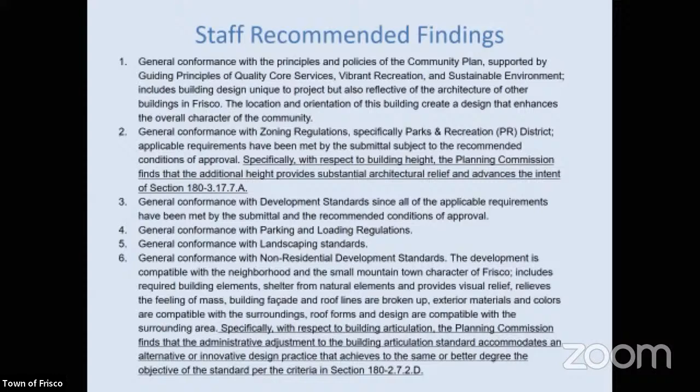Specifically with respect to building articulation, the Planning Commission finds that the administrative adjustment to the building articulation standard accommodates an alternative or innovative design practice that achieves the same or better degree of the objective of the standard of that section.

So with that, staff does have a recommended condition to apply, and this is to satisfy some comments from Summit Fire and EMS, Building Department, and Town Engineer. Summit Fire and EMS was related to fire access. Town Building Department identified that there's a second egress or second entry required from the upstairs. And finally, the Town Engineer had some comments about drainage.

So with that, staff has a suggested motion to approve with that one condition. And with that, I can take any questions that you may have on this. Great, thanks, Don. Any questions for Don? Robert?

We continue to talk about no new programs being added because of this building, but that critical word is because. Are there new programs going to happen in the Day Lodge? Because that would be an addition of programs over what we're doing between the two buildings.

Yeah, I think that's actually a great question for Diane McBride, who's the assistant interim town manager and also oversees recreation and culture, and is representing the applicant this evening.

Second question, and I may just have my head screwed up because I've seen a lot of different plans for different things - wasn't there a circle drive into this place at one point? There was, the original design at sketch plan, good recollection, did have a, not a full circle drive, but a cul-de-sac. That didn't really meet a lot of the concerns in the design, and it would have required some earth cut and fill as well. So as the design further developed, the current design for this hammerhead, which meets fire access concerns, was identified.

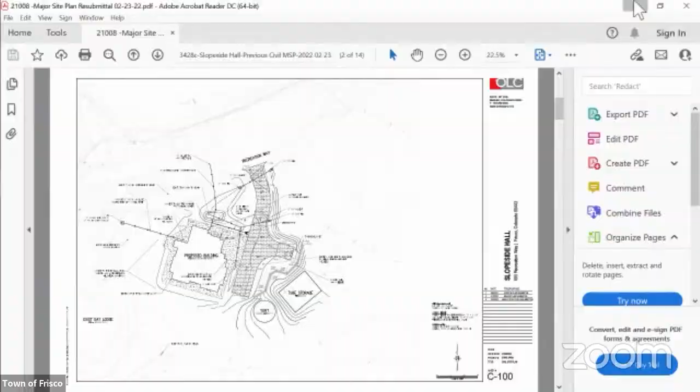Thanks. All right, Ira, any questions for Don? Yeah, just going back to parking. Is there more parking in the plan to be built, or how does that work? Correct, yeah, I'll go back to that presentation here real quick.

The parking that's shown in the master plan is planned to be built at some point as part of the overall master plan implementation, which is a multiple year thing. At this point in time, the town council did discuss that at their December meeting about the parking. I think the position that the town council took is it's not necessary for this building. They will observe conditions on the ground and see if additional parking should be implemented at some point in the very near future or not. Their stance is that it's not necessary at this time, and they believe that the current parking will be able to accommodate the new building and the existing uses out there.

Yeah, I mean, as a user out there, for the most part, it's adequate, but we have a number of high use days when there are cars everywhere. Yeah, and again, I think that's a very valid point, and the applicant may be able to address that a little bit further as well.

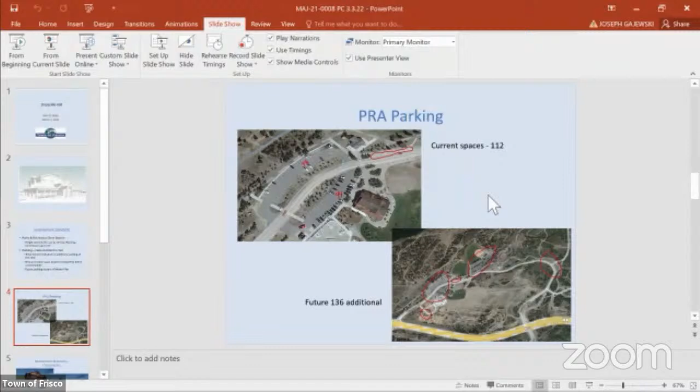Thanks, Ira. Patrick, any questions? No questions for staff. Great, thank you. All right, I will turn this over to set it up for. There you go.

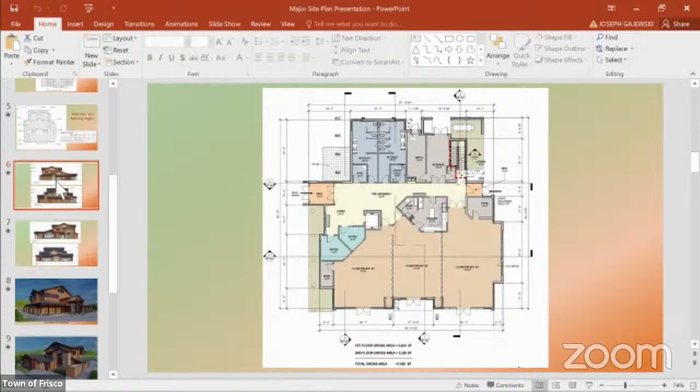So basically what we have done is we've created these little wing walls off the columns and created a shield around those so they're not apparent from Recreation Way. You don't see those condensers, and they're worked into the architectural elements of the building in a very cohesive fashion.

The renditions look worse on this screen than on the big screen, but the materials really haven't changed. There was a concern at one point about this element looking a little church-like, so we've tried to take some of the glass out and broaden the fenestration on that end piece to make it look more lodge-like, more consistent with the rest of the building's architecture.

This is the wing wall on the east side elevation that encases the condensing unit you saw in the plan view. And down here you can see all these solar panels facing south on the south elevation, pretty much covering every single surface.

We really didn't want to put those ground mounted out on the site. We wanted to get as much as we possibly could on that roof to achieve the goal we were going after.

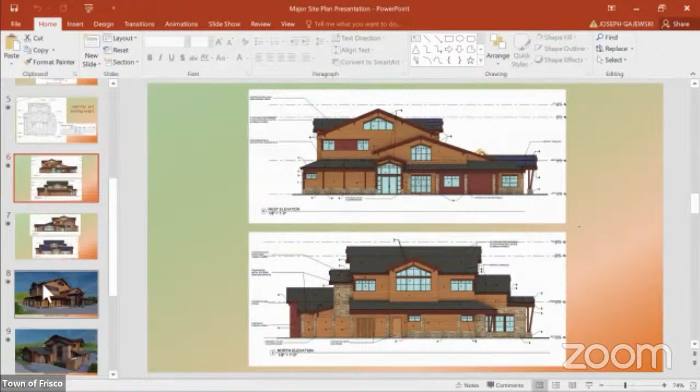So moving on, this is that vestibule. This is the wall where we've reduced the stone. Not really having a huge or major impact on the overall aesthetics of the building. Again, the forms of the building really haven't changed at all.

We've had to add this door for egress. We've had to make this stairwell just because of travel distances and egress distances from the second level. We've had to rate this stairwell, so we've had to add a door to the outside directly out of that stairwell, not going through the vestibule.

Here are the condenser units I mentioned before. You can see they're well shielded with the cohesive siding we mentioned in the sketch plan, which is concrete fiber cement siding, and also the stone pilasters that are a continuation of the pilasters across the front, or north side, of the building.

This is the secondary entrance on the backside, which staff will use, especially to enter this stairwell. They won't enter here, but they will enter here. This is just emergency exiting. So that is the east side of the building.

And then you can see the solar arrays from this view. This is the side that faces south and kind of over towards the Day Lodge, and you can see all the solar panels. The change to asphalt shingles is apparent in this view.

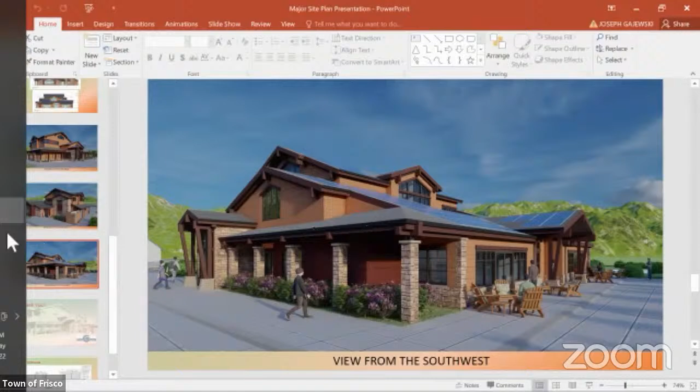I think that's the entirety of the presentation.

Sure, I've got a few, in no particular order. On that last picture we looked at, I was just checking the roof for slopes. What's your proposal for snow guards or prevention? There's a lot of slopes that go towards sidewalk areas, and some of them straight off of solar panels. Is that just a detail not shown in the set?

Yeah, we aren't at that level yet. We'll certainly have snow guards on the lower edges of those roofs. The slopes are largely at 4 to 12. This higher pitch is actually at 5 to 12. Okay, sorry, I took off so quickly. No problem, just hang out for just a second.

How about, let's see, when we talk about materials—that's one I unfortunately didn't have the opportunity to be here for previous presentations, so I'm taking it in a minute. But could you address how exactly similar this material palette is to the existing building it's adjacent to?

It's similar but different. The existing building, the Day Lodge, has an asphalt shingle roof, but I believe it's also got a piece of Cor-Ten on it. It has these same exposed wood elements that I think really hold those two buildings contextually together. The siding is very different - it's got sort of that false log cabin look with the split side, a veneer of what looks like log siding that's been stained. We tried to pick up that color, but being a little more modern than that predictable mountain building look.

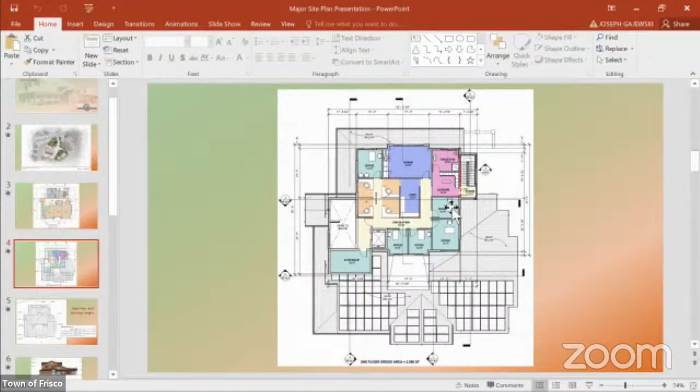I think that's it, I'll hold the rest for my comments. Thank you, Andy. Certainly, I think it's your turn, or did you already speak? No, I haven't, I don't have any further questions for the applicant. Great, thanks. No, I don't have any questions. Okay, thank you.

Is there any public comment? I believe everybody here is from the applicant, or is there a public comment? Anybody want to make a comment on behalf of the public? Okay, seeing none, moving on to commissioner comments.

Andy, we'll start with you. Yeah, I think we were generally in favor of the project before, and I'm still in favor of it. I appreciate the cosmetic changes that you made to address some of our issues. I really look forward to seeing the landscape plan, Megan. I know it's going to be awesome, but the renderings we got in our packet didn't include some of the screening in the 3D renderings around those new condenser units.

Looking at the renderings just put on screen, I don't know that those screens are the most attractive way we could hide those condenser units. I understand they're on one of the least visible corners, and I wouldn't mind seeing those screens a bit more attractive. I think it's going to be critical that we screen those with some landscaping, because coming down Recreation Way you're looking right at those mechanical screens, and in 2D they look like they're screening the units pretty well, but when you're actually moving past it, I think we're going to see a lot of those condensers, and the screens are going to look just like screens placed in front of them.